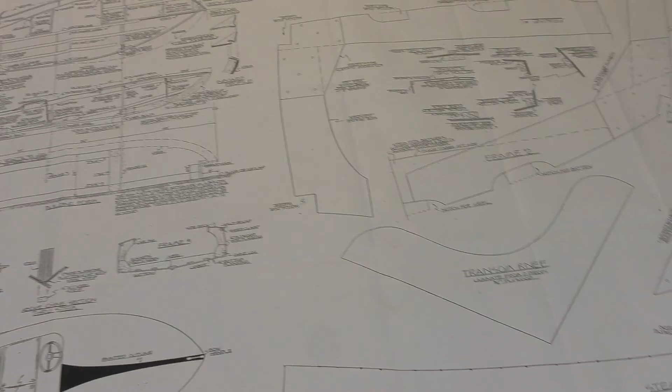So I suppose we can probably take a quick peek at them and see what I did and why I rebuilt the plans. Alright, so here's the plans as they came. Nothing too horribly special. They did fold it, which I think is ridiculous. You would think that if you paid for plans and then paid for shipping on top of that, they could roll it up neatly and put it in an actual blueprint tube or something. But I guess they just want to cash in the little bit of sales that they can make.

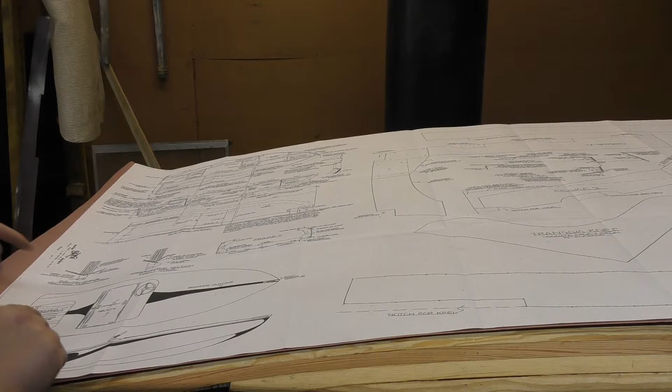So anyways, this is actually one of the Glen-L Squirt plans. Now the Squirt is actually a really small little guy, it's like 10 feet long and 4 feet wide at its widest. So if you think about it, it's good for kid size or one fat person. So not exactly built for my fat self and shoving someone else in there.

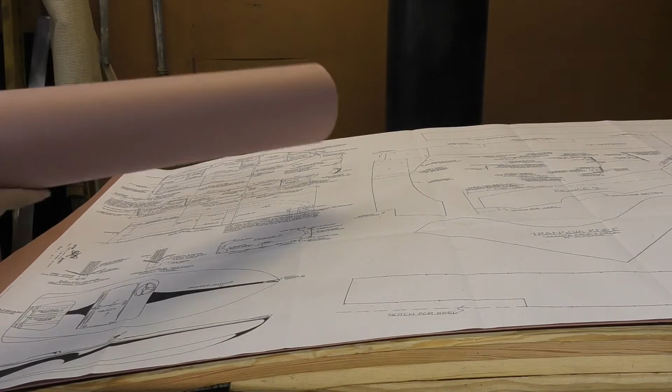So I decided I'm going to make something closer to a mega Squirt. So what I ended up doing was I took all these segments that they have written out and planned out, and I redrew every single one of the pieces. Probably a little bit hard to see, but each plan and segment, you can see it right there, I redrew to a different scale.

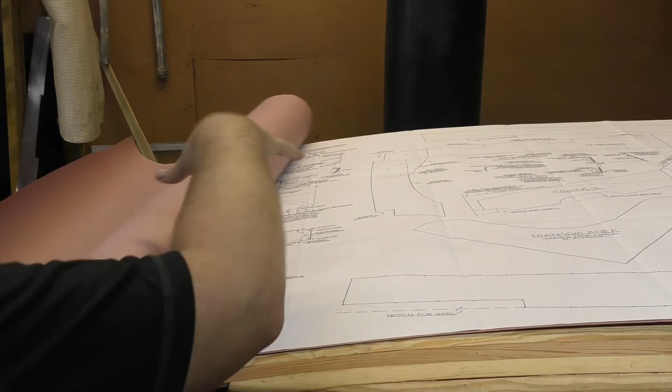As a general point, I went and scaled it to basically make it 25% bigger, kind of all around. But their plans specifically tell you that it's not a wise idea to increase the beam or width of these plans, because there's certain things that you have to take into account.

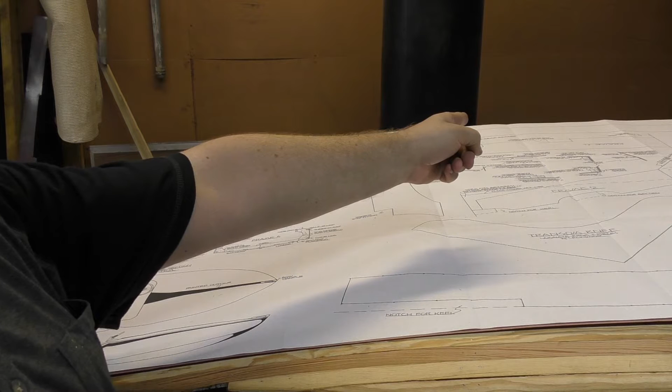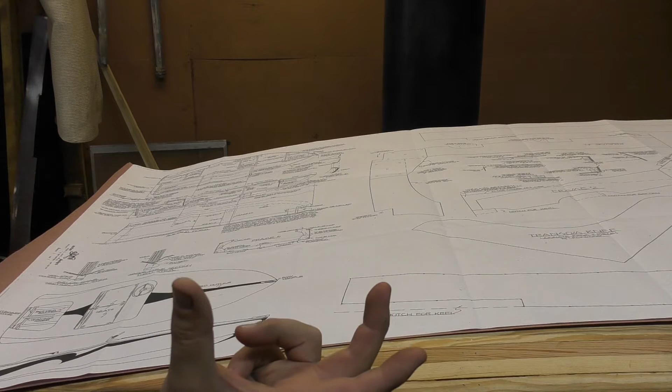So on this plan, you have a reinforcement at the keel, and then there's a reinforcement batten at 5.5 inches from the keel, and then from 5.5 inches over again, there's another batten, and then close to that 5.5 inches you end up at the chine. So these are the structural parts of a boat. So the quarter-inch plywood this stuff is made out of, there's really only 5.5, 5.25, somewhere around there, inches in between that it has to support.

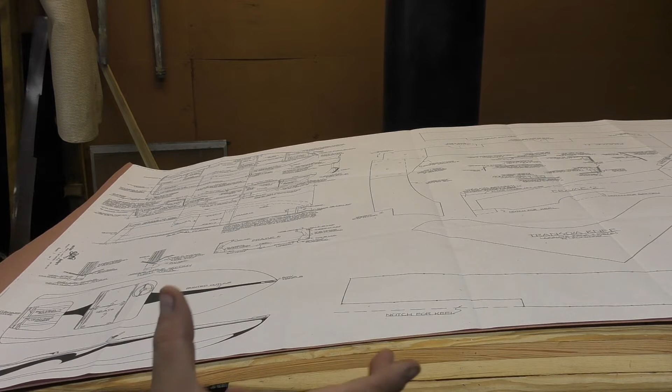Now since I widened this section, I widened it an entire 6 inches, I had to place another batten in there, which could potentially cause some issues further up on the frames as the battens start being phased out. So that'll be kind of interesting to see how that works out. But by adding that extra batten there, I'm still keeping the same 5 or so inches in between supports.

So that's probably why they tell you not to widen it, because if you just widen the spaces in between there, say you go from a 5-inch support suddenly you're at 7 inches of support, you're going to have a lot less support and your hull could start flexing, since it's really only made out of quarter-inch plywood.

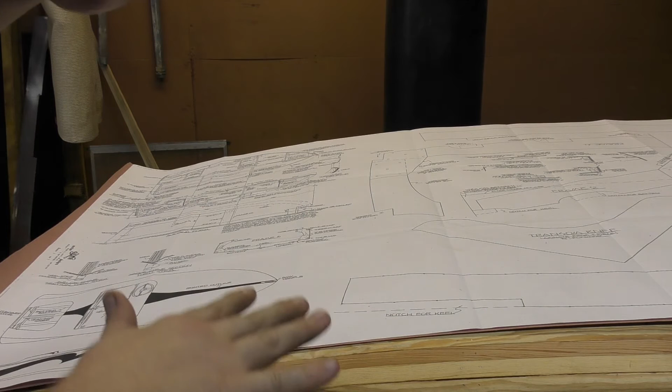So all in all, I added 6 inches to each half, so as a whole it'll be 5 foot wide instead of 4 foot wide. And then I added 2 inches to the height of it. There's a term for that, but I can't place that right now. Freeboard, maybe? Something like that. So I added a couple inches there, so it'll actually be a touch higher off the water.

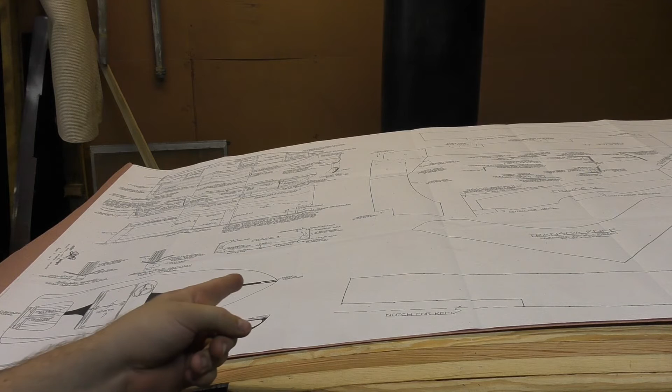Made it so there's a little more room for putting chairs and getting my large self in there. And then we're going to lengthen it probably maybe 2 or 3 feet. So the next size up in this runabout wood style that they have is a Zip, and that's a 14-foot long, but it's got an additional seat in the back. So it's essentially, you take this, make it 5 foot wide, add 4 feet to it, and then add another seat, and that seat makes up the extra 4 feet.

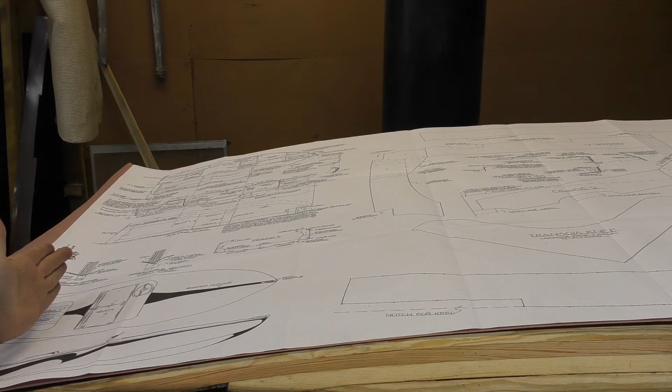So if we extend this maybe 3 feet, I can put something like sideways jump seats in the back there. Hopefully have enough room so there could be a space in between, so you can walk between the front and the back, so that way if you need to look at the outboard, you don't have to crawl over top of everything. We could probably shorten up that transom hole a little bit, but essentially that'll make us a mega Squirt, which is halfway in between a Squirt and the Zip.

And then you could even go one bigger from the Zip, I think that's like a Malahini or something along those lines, and then there's even a next step bigger. But we're trying to keep this on the cheap, and hopefully we can finish this without much effort. Some of the videos I found online building the Zip, they're blowing nearly 10 grand on these things, and I hope that we're not even going to be a fourth of that. So we're going to have to work really frugal.

From the initial look at it, it's only going to be about $800 or $900 in the wood materials. Then we've already got the outboard, so all that we really have to figure out is fuel, steering, and how we're going to finish the boat itself. So finishing the boat's probably going to add another $500 on top of that. So roughly we're working with a budget of about $2,000 for this whole boat setup, and we'll just have to see how well we get with that.